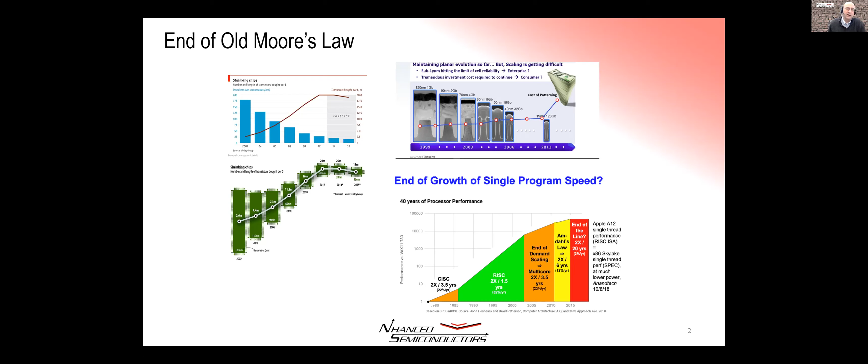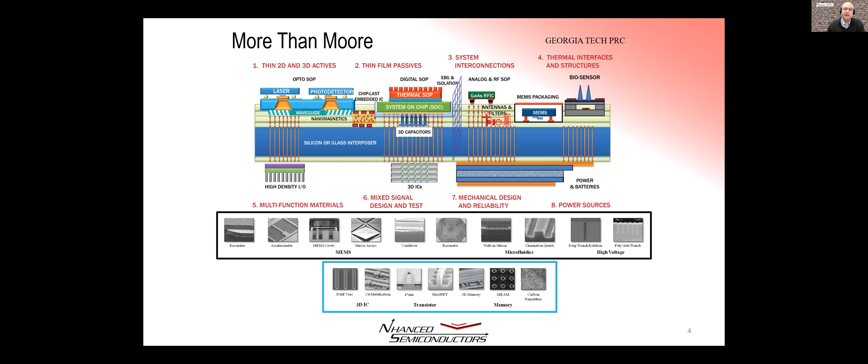Another thing driving the revolution or evolution of semiconductors into advanced packaging has been the Internet of Things. And really what underlies the Internet of Things and why it drives us this direction is we're doing all this More than Moore stuff. We have a lot of photonic things. There's many different types of sensors. There's lots of heterogeneous integration. You name it. And actually on this slide, at some point or another, we have built everything on that slide with the exception of the battery. We've never actually had to integrate a battery onto an interposer. But certainly all of those other objects, at this point, we have at some point or another integrated into an advanced package device.

And what is advanced packaging? Well, we consider it to be the 2.5 3D assembly of chips. So this is kind of a poster child picture of what we consider it. It could have 3D stacks. It could have copper pillars, micro bumps. It may or may not have an interposer, passive or active. It's really using semiconductor processes to give you packaging output. So if it's something you need to do in a fab, we generally consider that to be advanced packaging.

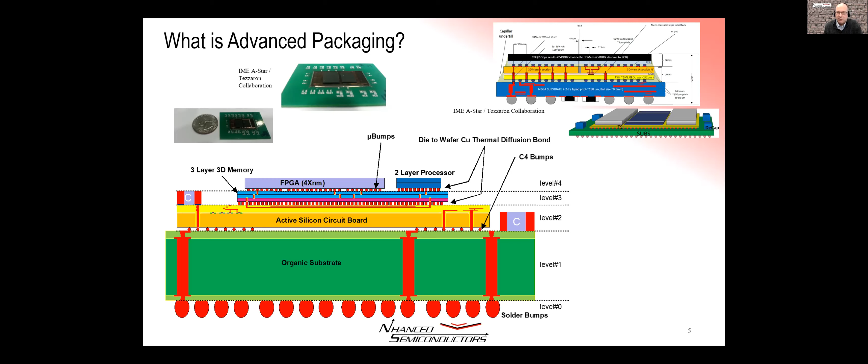If we stop for a moment and talk about interposers, silicon interposers are still the cheapest alternative. Organic interposers are running about 10 cents a square millimeter, 7 to 10 cents. Silicon interposers are running in the 3 to 5 cent a square millimeter range. And while that sounds bizarre, if you'd asked me 5 years ago, I would say that the organic packaging folks would never cede this space to the silicon guys, but they have. Silicon folks can use well-depreciated older equipment because we build everything very large. You can see the structures here.

A lot of the industry, like the GPUs and the folks at Xilinx who use silicon interposers, are using the last or the top 3 metal layers from a 65 nanometer process. So they're roughly 1 micron geometries. At NHanced, we build thicker metal interposers because we try to propagate at higher frequencies than they need to. So we tend to use 2 micron line and space with 2.5 micron thick metals. That gives us the ability to go 30 millimeters at 4 gigatransfer. And that, when we originally started it, was kind of the requirement for customers that wanted to put large chunks of memory on interposers with processors.

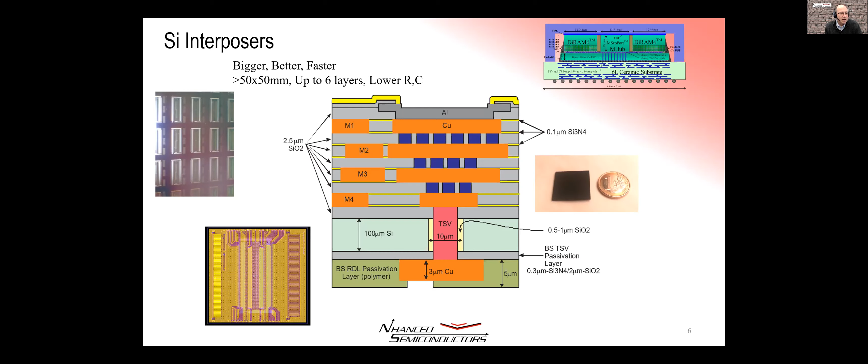So what are the choices and risks as we look at the different kinds of technology? If you look at the bottom of the slide where you have things like POP, package on package, it's practiced by ASE, Amkor, many of the quintessential well-known packaging folks. It's very low cost, but there's very limited interconnect, and you have a lot of parasitics still left, even though you've brought the chips together.

At the opposite end, kind of at the top, you're looking at wafer-to-wafer bonding or monolithic sequential assembly of 3D. Those processes are, in terms of cost per connection, way, way better. To give you a scale, when we do wafer-to-wafer assembly, we do interconnect down to about 2.5 microns commercially. Experimentally, the smallest stuff we've built is 0.8 micron pitch. We can have hundreds of millions of interconnects on a wafer. So it's far, far higher density than you could do with a POP.

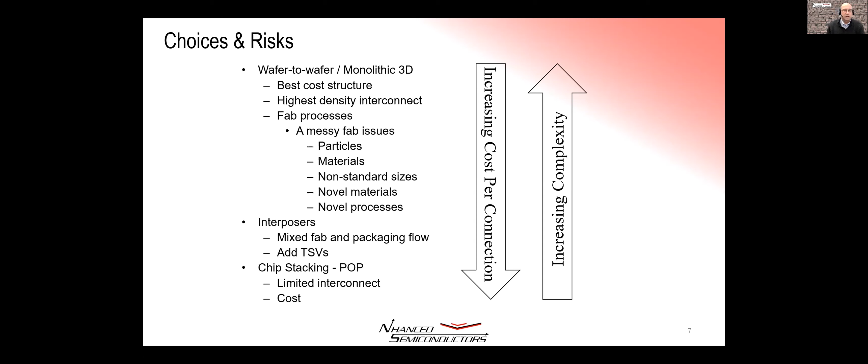Those processes are all fab-like processes. And then there's virtually a continuous spectrum from this very high end to, I'll kindly use the word, the low end advanced packaging of something like POP. So challenges and opportunities. Silicon interposers are great little things, but they are glass. There's fragility, handling. The industry has been using 100 micron thick interposers. Shipping 100 micron wafers around the world is not for the faint of heart. We see a lot of wafer breakage at that thickness.

So it really requires effort in working with your supply chain. And typically you have to ship really thin interposers like that on handle wafers. The organic interposers, great stuff, but it's a real cost challenge for the people in those marketplaces, because they don't have clean rooms, they don't have steppers. As they get below 5 microns, they start to need to look at real clean rooms and stepper technologies and planarization. It is an enormous hill for them to climb.

The other thing with the organic interposers is you can build them really big, but the CTE, coefficient of thermal expansion, mismatches can rip things apart. In an earlier slide, you may have seen building silicon interposers to about 50 by 50 millimeters. You can go a little bit larger. That is limited by the mismatch between the silicon and an organic substrate that you want to attach it to. If you get bigger than that, it just simply rips the solder balls off either the organic or the interposer.

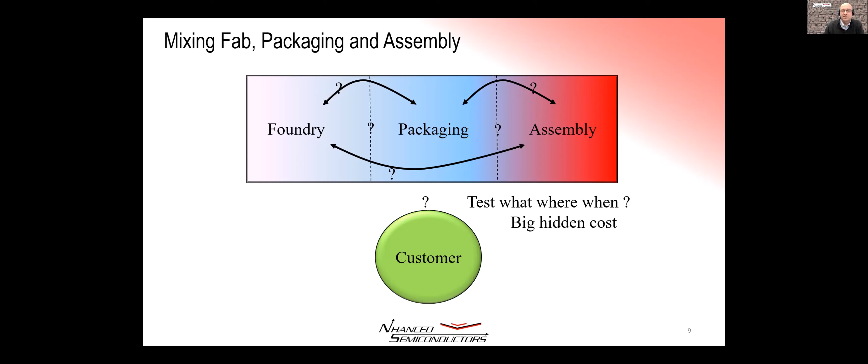So, moral of the story in a lot of this advanced packaging: significant planning required, careful analysis of where the yield costs are. You need methodologies. If you have really high pin counts, if we're doing wafer to wafer bonding, and we can have 30 million interconnects on a die, I'm not aware of any 30 million channel testers. They don't exist in nature, so you have to have a different strategy.

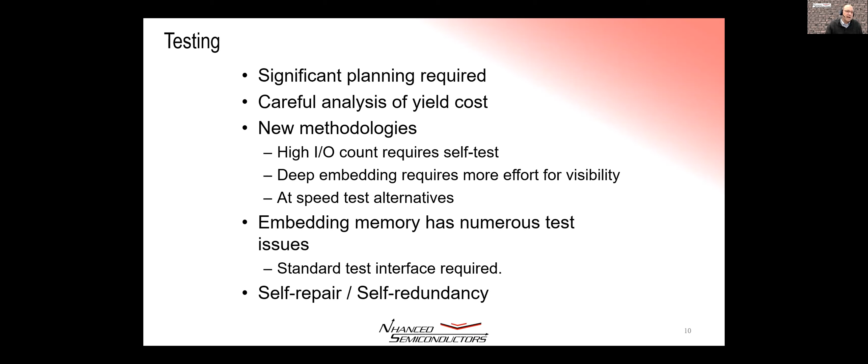And what we lean on very heavily is the bottom line there. It's self-repair and self-redundancy. You have to assume that parts are going to be bad and plan for repair parts and repair elements in those. I'm going to give you an example, and memory is a really easy thing because it's kind of inherently done for repair. This was a part that Tezzaron Semiconductor, which is a predecessor company to NHanced, did. So we had a stack of 16 layers of DRAM, then a controller layer and an IO layer.

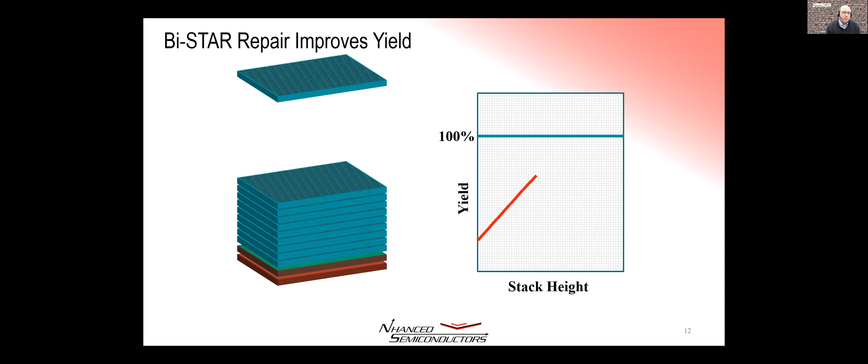So there were probably about 100 million total interconnects vertically in this, and it had on the order of 1 trillion devices in the stack. So it's not too surprising. We don't test the DRAMs beforehand. They have to yield in place, and we needed strategies to work with that. Well, by planning differently, as we added DRAM layers, our yield did not go down, it went up. And the reason it went up is we shared repair and redundancy vertically in the stack.

When you do it laterally, it's hard to share repair bits on this side of the die for a bad memory array over here. But if we do it vertically, those layers are very close together. They're on the order of about, in this case, 14 microns apart. So we could share redundant rows and redundant columns vertically in the stack. So unless you had a systematic problem in your design that caused failures always in the same area or something in the processing, if they're normally randomly distributed, you actually get more repairability by stacking than you do in 2D. So you can get better yield in a 3D device than you can get in a 2D device.

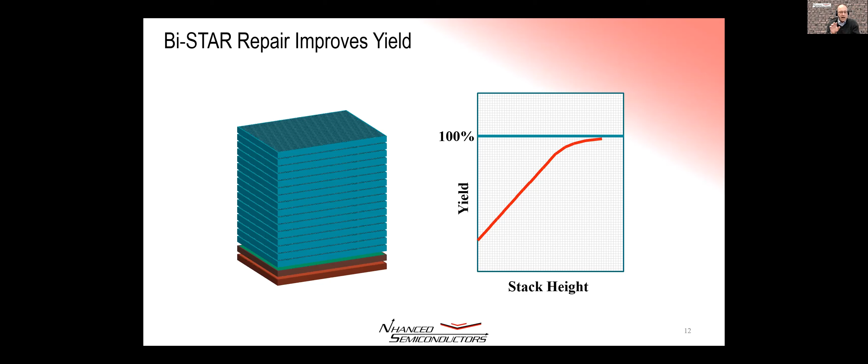The moral of the story is you think differently. When you move into these areas of very advanced packaging, and especially 3D, it requires a shift in how you think about how you make parts yield. Other obvious extensions of this are spare processors. We all know that you buy a 4-core processor, it probably really was 8 cores and there was a bad core, or you buy an 8 and it was really a 12, or a 12 was really a 16. The processor guys have been doing this for a decade already.

There are things like smart interposers that can be done to reroute around bad things. We've looked at doing FPGA repair kits. What many of you may not be familiar with is when we do a 7-nanometer chip today, you put in unused, uncommitted, spare logic into those devices. Now, it's not an FPGA in those devices, but you put in all the transistors, so you can come back and make a couple of metal mask changes and spend only $1 million rerunning the part rather than $15 million with a new mask set. So it's very common to use repair kits today in advanced semiconductors to come back and fix logic flaws.

An extension of this is to use FPGA-based repair kits that are built into 3D devices. Another thing that probably most people don't know is HBM memories have redundant I/O. In the first generation, they used the parity line that could be taken over and used for a data line if it failed. In the later generations, they have dedicated redundant I/O because for them, that was the Achilles heel in assembly. As you stack things in HBM, they use TSVs, but they use solder balls in between them. Planarity is an issue. The stack goes through multiple thermal cycles as it's assembled sequentially, as well as onto the interposer, and then eventually onto a substrate. You have to be able to go back and repair those devices. In fact, HBM memories are fuse repaired for bad rows, columns after the package assembly is done with the GPU.

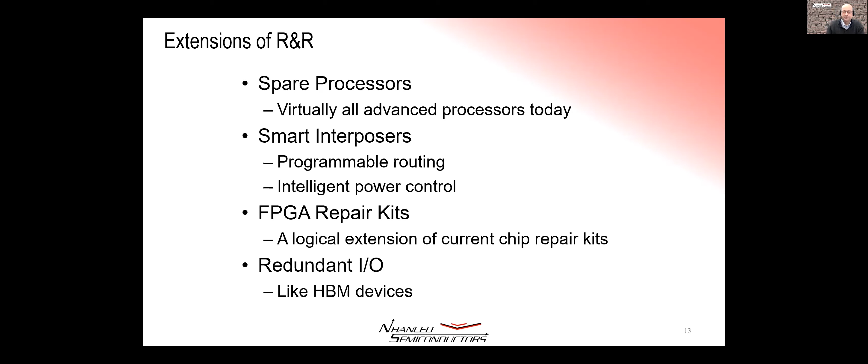Some data points. Looking down the road, it seems the market is deciding that chiplets are a likely direction to go. There's very little benefit to building analog circuitry at 7 nanometer. In fact, 7 nanometer analog is gargantuan. You have to tune virtually every transistor because transistor matching is abysmal. There's really no reason to do it.

So if you look at a typical cell phone chip, there is enormous cost benefit to building a lot of that analog at 65, 45, maybe 28 nanometer, and you leave it there. It improves cycle times because now your new 7 nanometer or 5 nanometer design is really going to concentrate on the core digital circuitry, which really is what changes generation to generation.

A very important thing: known good die is really known not bad. It is illusory to believe that a known good die is actually fully tested. Even if they do a really good job of testing it, it is not going to be done at speed. So you need to be aware of it. As I mentioned earlier, 2.5D and 3D have lots of I/O. Die probing is very difficult. Die probing actually can cause more damage and reduce yield more than just simply doing blind assembly.

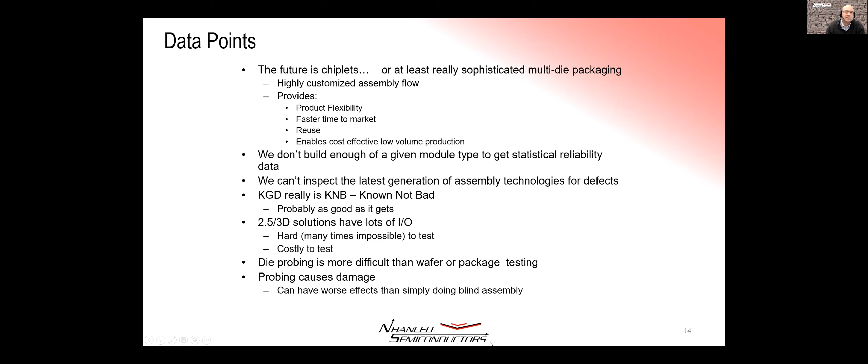I'm going to go into the process here, and I don't know how I'm doing on time, but I have about 7-8 more slides here.

So this is the DBI process. It's the direct bonded interconnect. We do this at wafer scale. We can also do it as die to wafer. You start with a wafer out of the fab. We have a metal bond pad pattern at the top. Usually that is done in copper. It can also be nickel. Using CMP, we polish the surface atomically smooth, to typically about 0.3 nanometers RMS. The wafers need to be very planar. They also need to be pretty flat so that they bond well.

We do a plasma activation. What that does is it takes the silicon dioxide, or it could be silicon nitride, and it opens up the bonds. We end up with silicon with, instead of oxygen hanging on it, hydrogen hanging on it, or nitrogen hanging on the tips. When you bring two wafers together at room temperature, they will spontaneously bond. There's a van der Waals bond that's formed immediately. I didn't put the film in today to show it, but it's in real time. You can actually see the bond wave propagate if it's a glass wafer on the top. After that, we anneal it, and once the annealing is done, it's permanent.

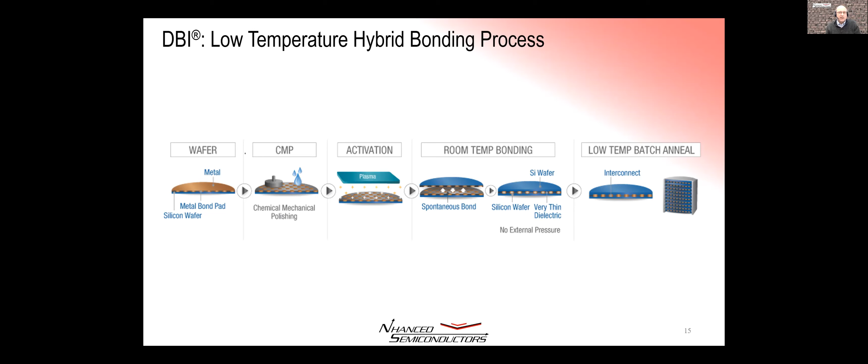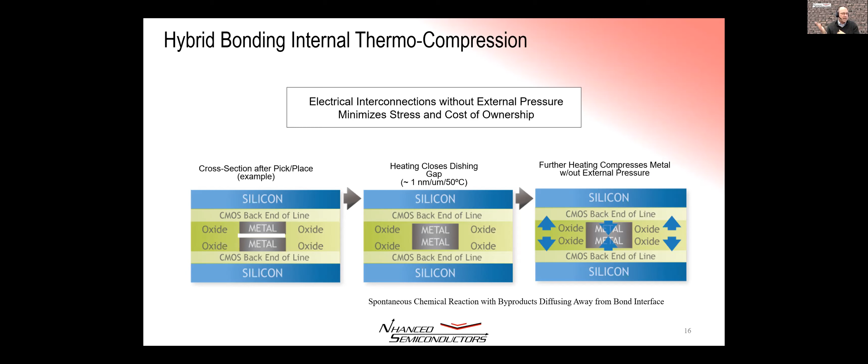How this works is, after we've done that room temperature bond, it looks like the left-hand side. The metal we polish so it's recessed 30 to 50 angstroms from the surface. When we heat it up, we use nature, physics here. Metal expands more than the oxide. The oxide acts to pull this together. The metal extrudes, and it does grain growth across that boundary. So after we're done, typically this bond interface is stronger than the interfaces at the lower layers of metal on either wafer that's bonded.

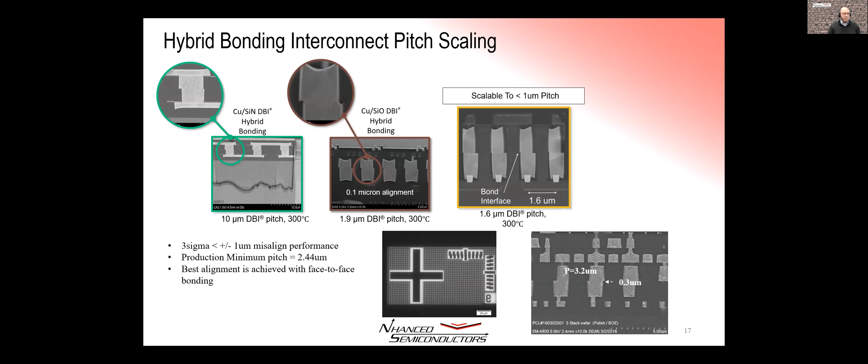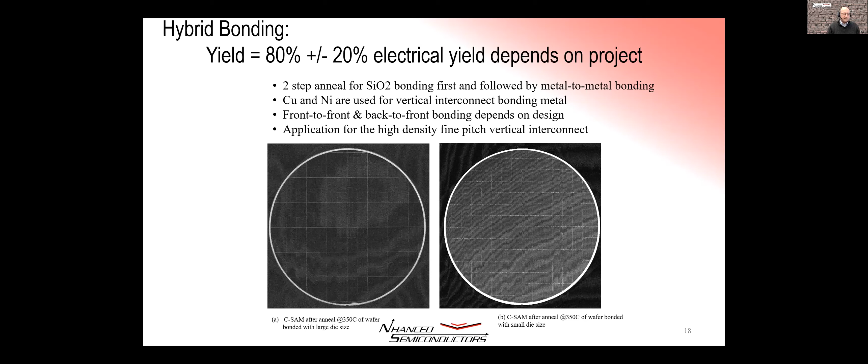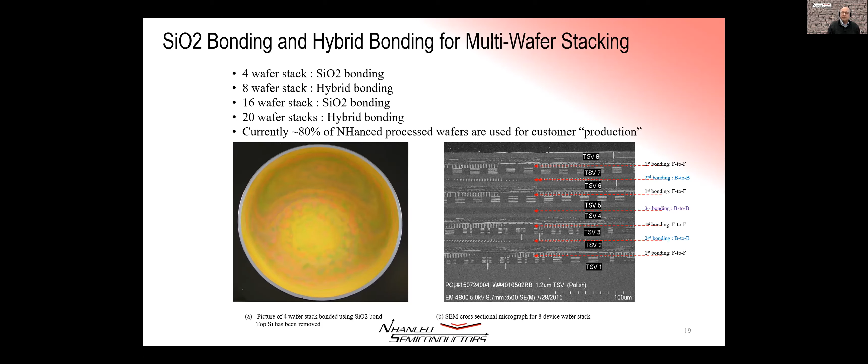We actually have a production part that has 16 layers that we assemble. And I have some disappeared pictures here, unfortunately, that show gallium arsenide wafers. The good news is the one on the right is actually what it looks like up close, indium phosphide. You can do heterogeneous bonding.

We do gallium arsenide, silicon carbide, lithium niobate, gallium antimonide, gallium nitride, all in various combinations and with CMOS. So you can get very, very high figures of merit. If you're familiar with Johnson figures of merit, we can easily get 3 orders of magnitude performance improvement as opposed to any silicon process or any other single process. Heterogeneous integration gives you a lot of performance boost.

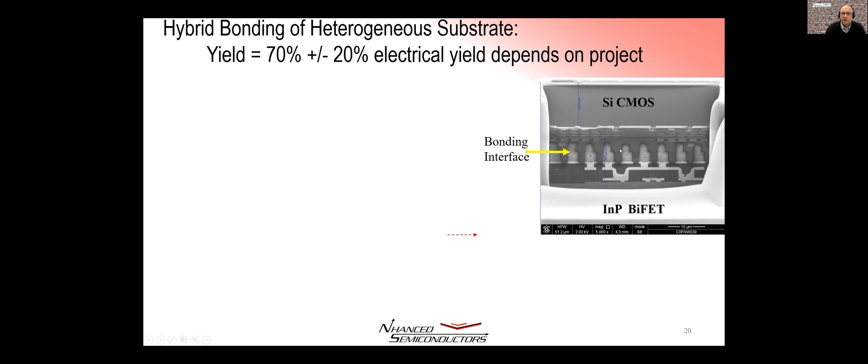And I don't know why it's doing this to me. I'll tell you what, just in case this happened, I did prepare a very quick backup to a PDF. And that doesn't want to show either. Like you guys were saying earlier, if anything can go wrong, it does. Okay, we'll go back just to the PowerPoint here. I'm almost done anyways.

So I'll move on. Other things that we can do. The previous slide, by the way, was just showing off some of the die to wafer work. Looks very similar, except it's die sitting on other die. We also do quilt packaging. This is an interconnect technology where we form pins on the side of the die. And you can abut these. It allows you to, basically like Lego blocks, put things together. You can also build these three-dimensional devices.

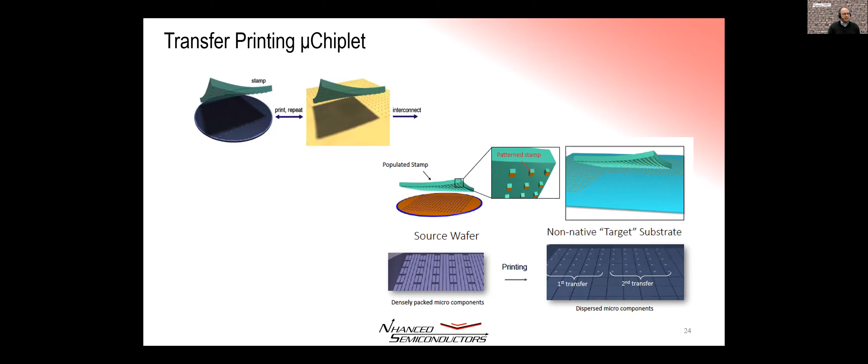So you can put down chips as small as perhaps 25 by 25 microns and directly interconnect them on the surface of another die. You're really transfer printing a very thin layer, on the order of about 10 to 15 microns, of material containing that device to the new host layer underneath.

So in summary, what NHanced does is, we're a small, medium scale semiconductor manufacturer. We have a fab in North Carolina. I nominally talk about us as being a back end of line fab. We don't build transistors. We do a lot of unique things. We do build diodes. So the wafer at the top there is actually a dark matter detector. It's a 5 millimeter thick silicon wafer that we build. So we do a lot of this very novel processing, primarily for mil-aero, science, medical markets, and a lot of other custom sensor markets in the industrial area. And with that, I'm done, and I'm open for questions.

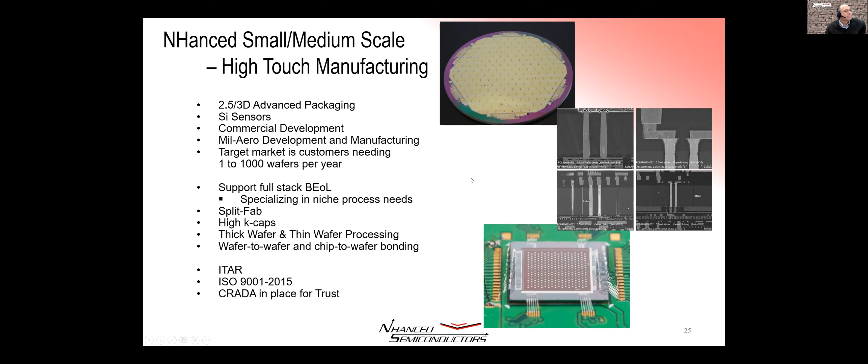Hi, Robert. Thank you very much. It was a great presentation.

Couple of questions. One that came through: you mentioned double patterning and the move to EUV. Is the reference to double patterning here a side-to-side stitching, or in order to exceed ASML reticle size for a larger die, i.e. greater than 26 by 33?

The double patterning is actually to produce things below the resolution limit of a stepper. Using immersion 193 technology, you can print at about 40 nanometer line and space. But you can actually align the mask to about 4 nanometers. So what you do is you do one shot that has every other line, and then you change out the mask and you do another shot that has the intervening lines. And you can then get the equivalent of 20 nanometer pitch out of something that started with 40 nanometer resolution.

Field stitching is something that's commonly done to make something bigger than the reticles. Today's reticles, most of them are 26 by 33. So if you wanted to build, you know, an interposer that was 50 by 50, you'd have to tile 4 fields. Field stitching works very well. You have misalignment at the edge, and that's typically on the order of nanometers to small tens of nanometers.

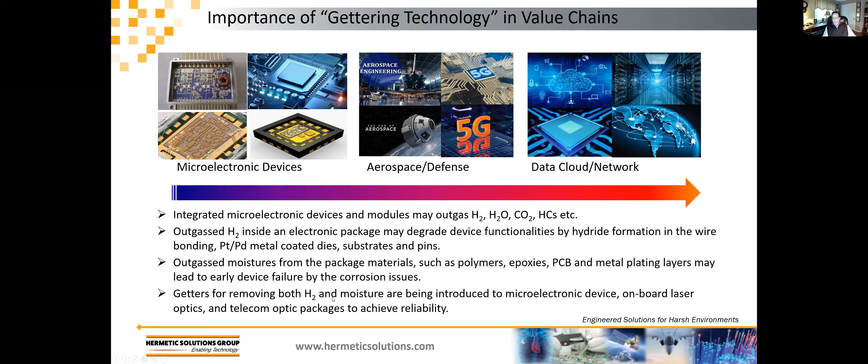Most integrated microelectronic packages and devices outgas hydrogen and moisture and carbon dioxide just naturally as a state of the manufacture of the package. And that presence of hydrogen, which we're going to speak about today, inside that electronic package can degrade those packages over time by forming hydrides. And those hydrides can affect the wire bonds, the solder, all the solder connections within the package, and also affect the gates themselves within the semiconductor structure. So today, we're going to talk about getters being used to remove hydrogen, and then its resultant effect on the reduction of moisture in all these hermetic packages.

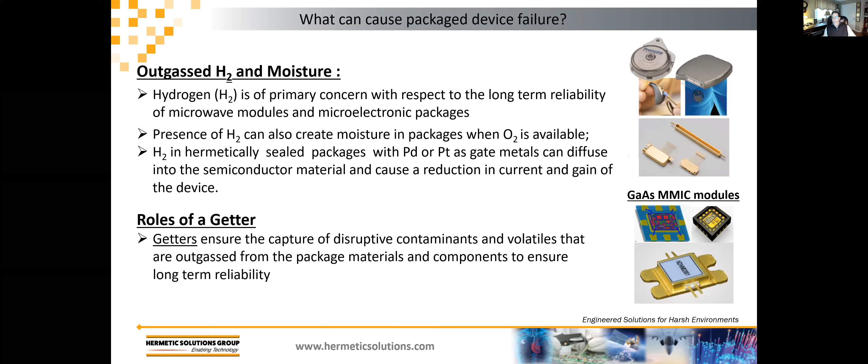So what causes this hydrogen-based device failure? As I said earlier, if it's in high enough concentrations, it typically affects the long-term reliability of the microwave module or the microelectronic package by attacking the gate materials themselves within the semiconductor structure. Also, when hydrogen is present within a package that has oxygen in it as well, they can very often combine and create moisture within that hermetic enclosure. So we use getters to capture those contaminants and volatiles inside that enclosure, essentially scavenge that material and hold it in place so it can't act freely within that hermetic environment.

So when you manufacture, in this case, we're going to talk about palladium and the use of palladium. In our case, we're taking pure palladium foils, and we're building these large reels of palladium foil, rolling them down, compacting them into different thicknesses that I'll talk a little bit about later. But building this material to varying thicknesses to fit certain headspace within a hermetic enclosure. So as the material is rolled, we will then process it into any kind of custom shape so that this material can then be included into the hermetic package.

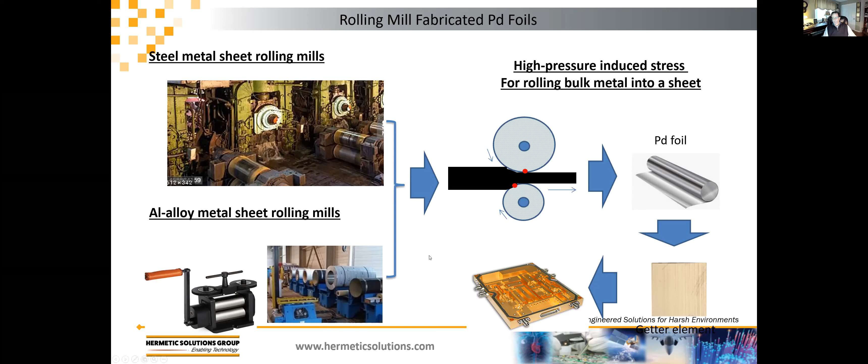So typically, as this material is rolled, we can build this material, as I said, in pretty much any thickness, any kind of form factor, length, width, and thickness, and build this material as thin as 2/1000 in thickness, all the way up to whatever you'd like, whatever the headspace in the package will allow. And then we can custom build this material to pretty much any form factor to fit in the hermetic space. Typical attachment methods of this material are either epoxy or tack welding of the material into the hermetic enclosure.

And why do we use palladium? In this case, palladium itself has a very high absorption capacity. Here in this example, palladium has a capacity of 11.2 torr liters per square centimeter. And that's really quite high as compared to any other kind of native metals. And the absorption rate of this is around 0.5 to 40 ppm per minute. Again, very rapid absorption rates. The other nice thing about palladium is it does not require any kind of thermal activation as compared to some of the other zeolite type or silicon type materials that are commonly used.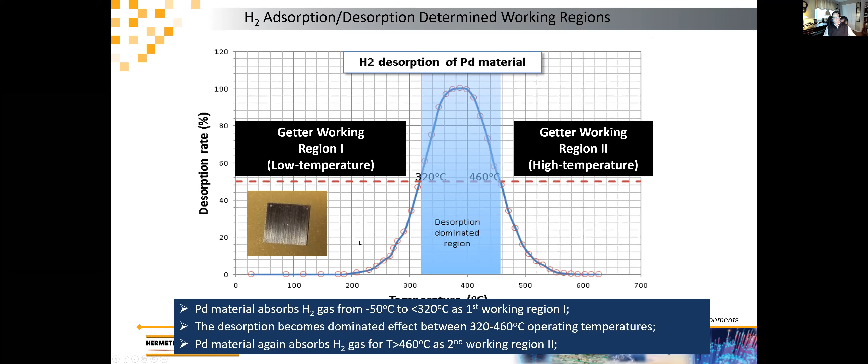So to test this material, my colleague Hua developed this test process with our friends at Oneida Research. In this case, we're doing a manometry measured absorption of this hydrogen getter, essentially a palladium substrate placed in a sample chamber. And in this test, we introduce a known value of hydrogen into the sample chamber. In this case, we were using a 3% hydrogen within the gas that's introduced into the chamber, and about 97% argon. So we subjected the sample of palladium in the sample chamber to this gas mixture.

We decided to take away a gas sample after so many hours of operation. In this case, this sample, by the way, it's about a 1-inch square, I think, of material, was placed in the chamber. And at 300 minutes, we withdrew a sample of the gas in this chamber and did an IVA analysis of that gas sample. And we see that what was 30,000 ppmv of hydrogen, that sample now shows that the getter has absorbed and reduced the hydrogen limit down to 25,563 ppmv.

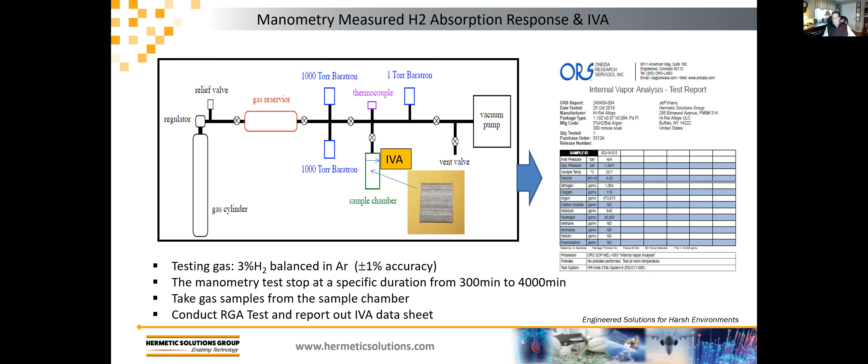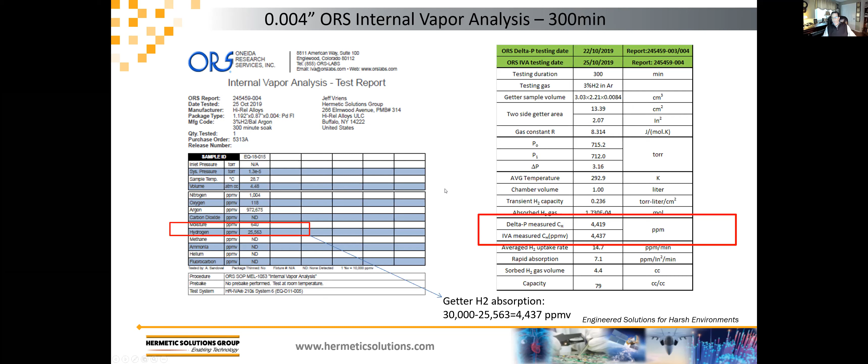So then we took that very same sample and ran it up in this case. I'm sorry, I jumped a slide. So if you evaluate this 300-minute sample, it's essentially saying that after 300 minutes, this sample absorbed 4,437 ppmv over that 300-minute space of time. So then we continued to run this getter sample up to 4,000 minutes. And you can see here on the left in the IVA analysis that the level of hydrogen has continued to drop within the gas sample that we pulled. And essentially over that 4,000 minutes, we've consumed roughly a little more than half of the hydrogen that was available in that sample. So it shows that kind of a curve of continued absorption of hydrogen.

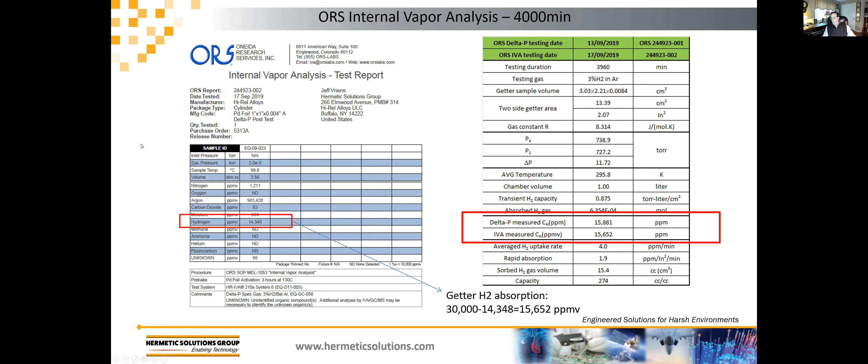So how does this material absorb hydrogen? And I can certainly call on Hua here to speak a little bit more to this, because I'm not quite as aware of the chemistries as Hua is in the effectiveness of uptake with argon present.

Okay, this is a model we try to use to explain the absorption capacity of this palladium getter. We know that the testing uses a mixed gas, argon and hydrogen. So we developed a model for this kind of mixed gas to predict the absorption function and also the gas absorption rate. We know there is a lot of theory about material outgassing kinetics, and we used that as a reference for the theoretical work we developed here to predict the mixed gas.

What's really the absorption concentration as a function of time, and also the gas absorption rate as a function of time. We can see there's an index called nu, which is very critical and is used in the outgassing formula. Normally for hydrogen it is 0.5, but in our case, for the palladium absorption rate, the nu we found is about 0.55. It's a little bit different, but this reflects the multi-gas absorption. It's not outgassing, so that's a small difference.

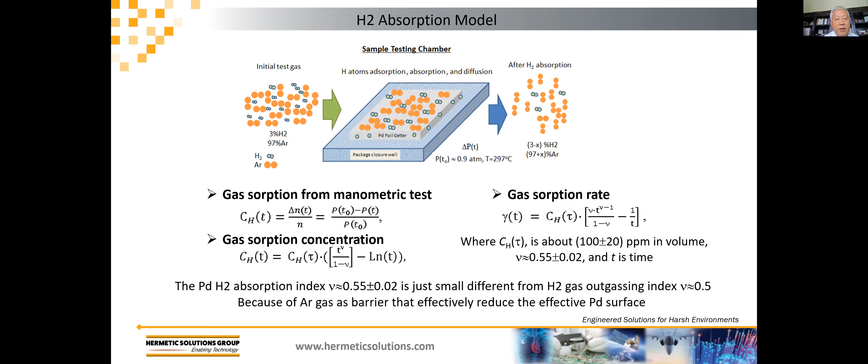But this gives us a basis to understand how palladium works as a getter, and how we can predict it at different capacities and absorption rates. That can guide us to use it for different package applications. So, next slide.

This slide gives you both testing data and theoretical data. This is the modeling fit. The data on the top, P0 minus PT, is the measurement data from the RGA testing, because in the testing chamber you can only measure the partial pressure variation. Using that variation, we can calculate how much hydrogen in ppm is absorbed as a function of time. The bottom black data is the absorption rate, the concentration change as a function of time. Using our formula, you can predict or fit this data.

You will find that this nu factor is only about 0.55, and the simulation of both the absorption rate and the capacity does a pretty good job predicting the hydrogen absorbed by the getter. From the model, you can see 4,419 ppm, and the RGA tested 4,437 ppm. That's a small difference, and it's very consistent, which shows this theoretical modeling works. Typically, we can see the absorption rate.

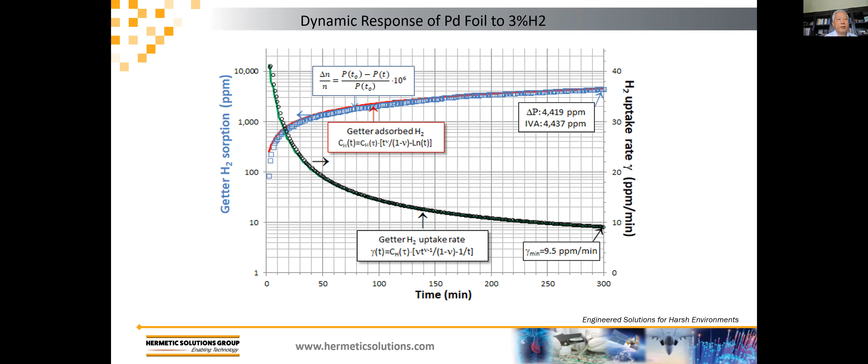Okay. Dave, you want to talk about this? No, go ahead while you finish this one.

Okay, this is the data for the getter we finally made, 1 inch by 1 inch and very thin, because this can give us a guideline for how much hydrogen we can absorb from a package. A lot of the time it depends on the volume of the package. The total outgassed hydrogen could be 1% or 2%. We normally define below 5,000 ppm as a low outgassing package. If you have 1%, 2% hydrogen over the total lifetime, normally 10 to 20 years for the package, we have to calculate. If we have over 2% maximum hydrogen outgassing from this package during its whole life, the getter we select really has to have more than that 2% capacity.

So this gives one guideline for how this palladium material can work as a getter at different thicknesses.

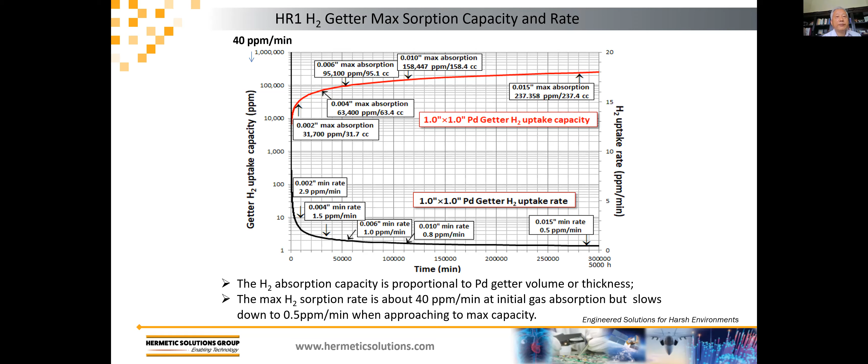We do have other publications regarding the outgassing rate of different materials like epoxy and polymer metal. There we can say this getter can absorb a factor of 2 or 3 faster than any outgassing material, which ensures the reliability of the electronic package. Okay. That's good, Bob. You go ahead.

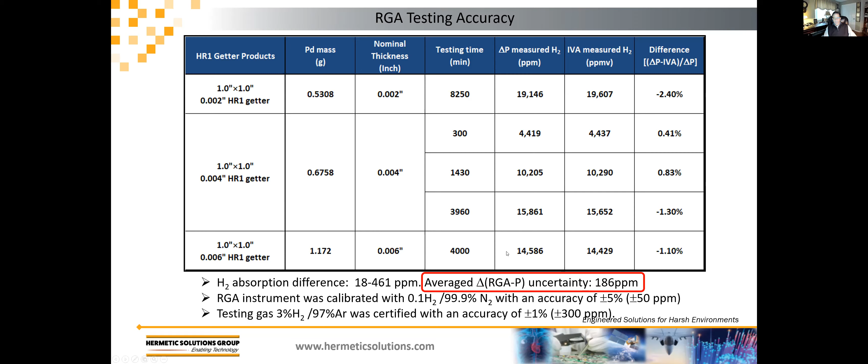Okay. So one of the things we wanted to do was evaluate what level of uncertainty the testing would provide us in RGA. Through some of these calculations, using different getter thicknesses and different mass levels and thicknesses of palladium, we were able to determine that the level of uncertainty in that RGA sample is around 186 parts per million. Then we wanted to look at this in a practical sense, using this palladium foil in a hermetic enclosure.

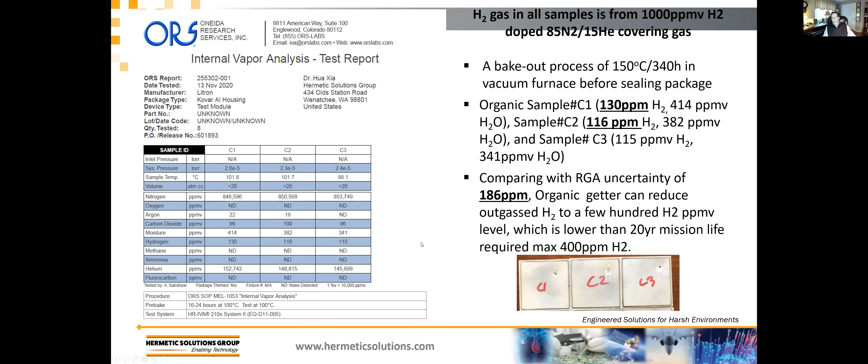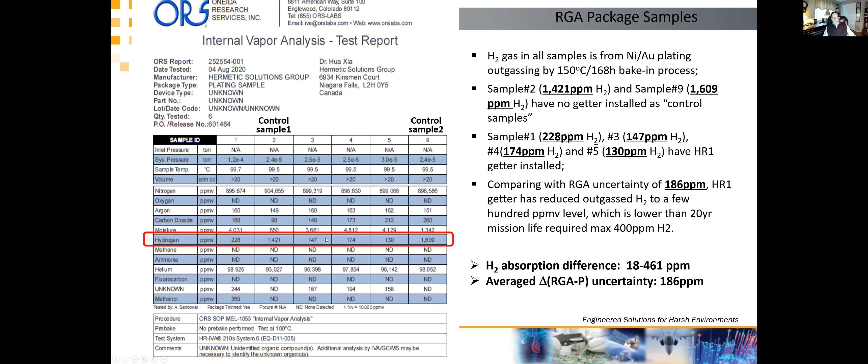So in summary, everybody should understand that the package constituents, everything that makes up a hermetic enclosure, can outgas harmful species of gases inside that enclosure. The very metals that make up the package and the plating chemistries are known to outgas hydrogen, as are organic materials like epoxies. These harmful species can create additional harmful byproducts when combined, for example, with oxygen. Free hydrogen combined with oxygen creates moisture. We understand palladium is a suitable material for gettering hydrogen, and that it will reduce the formation of moisture.

The neat thing about palladium is that, not in all cases, but in some, it can be tack welded to the inside of a package, eliminating the use of epoxies or other materials to hold it in place. So you eliminate one level of materials that can outgas volatiles into the package. The other neat thing about palladium is you can roll mill this material to varying thicknesses. It can be stamped into different sizes and form factors to fit in very low headspace areas. And lastly, palladium does not require any activation.